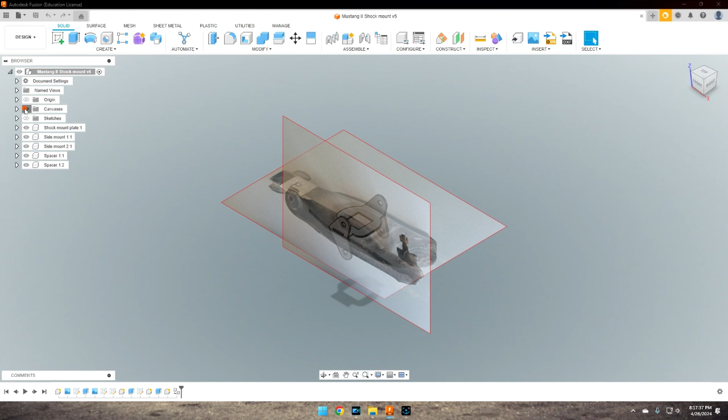Okay, so I'm going to walk you through real quick on how I managed to design this part in Fusion 360 without the need of 3D scanning. Let me open the file up here, it'll make it a little bit easier for us. I'm not going to try to redesign this part, we're just going to open up the one that I currently have and go from there. Let me turn some of this stuff off so we can walk through it.

So what I did was I actually brought the part in through canvas. I laid the part down on a flat surface, took my cell phone, and I've got a little cheap level thing, like a bubble level, it's round. I set it on top of my cell phone to make sure I get a good level, square picture of the item I want to do. Once I have a dozen pictures or so, whatever you want to insert.

Once you have your pictures done and uploaded, you can click on the insert function, go to where you have the file saved, and then select insert. Now once it's inserted, you get this. Let's look at it from the top.

The pictures, I just took with my cell phone, it's not a 3D scan, it's just a two-dimensional picture. You can see here looking at it from the side, that's what you get. But what you can do is come here on the picture, right click, and then calibrate.

It kind of goes this color, and you can pick a spot that you have measured that you know the dimensions of. So I picked a spot like here and here, and I know mine is roughly 60 millimeters center to center. When I set that, it scaled out this whole picture.

Everything was scaled, everything looked good. I'm loving it. We're good, we're golden.

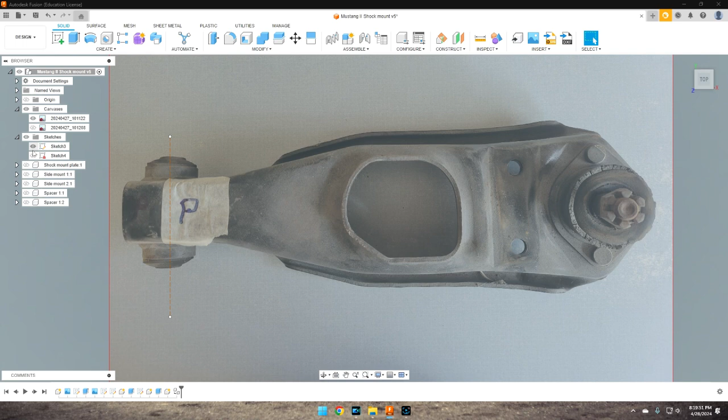So that's done. I started creating sketches. My first sketch, I can come down here, we click on the sketch feature that I ended up sketching out with my dimensions and stuff that I generated, based off my drawing, which got me pretty close.

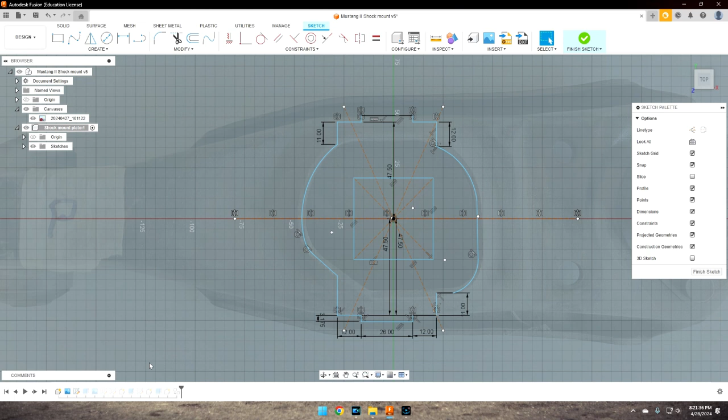This is not the first sketch that I did. The nice thing about parametric modeling is that you can go back in time, make changes, and it changes everything to the future. So we've got the first sketch done. You can see it kind of on top of that model there.

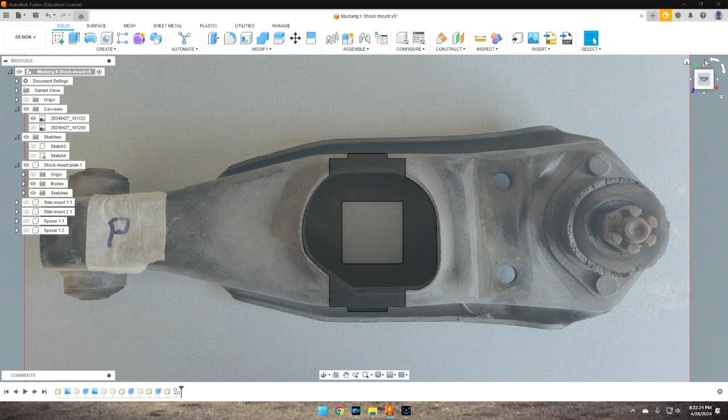And then once we did the extrusion, you can see what the actual bodies look like. So this is what the body ended up looking like on the side. Now, again, this is a 2D model. So if we want to finish designing out what we need to do, we need to bring in the next picture.

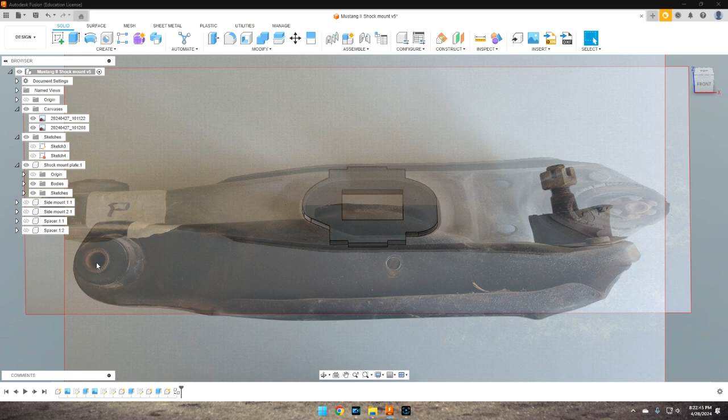So here's the next picture. I brought it in. Now what I did was I actually drew a center line through this bushing back here so I could line it up on this view and get us the center view. Now I brought this picture in and I didn't want to do a whole bunch of trying to move things around and get it exactly right, but this plane here, actually I wanted it a little bit lower. I want it almost flush with this.

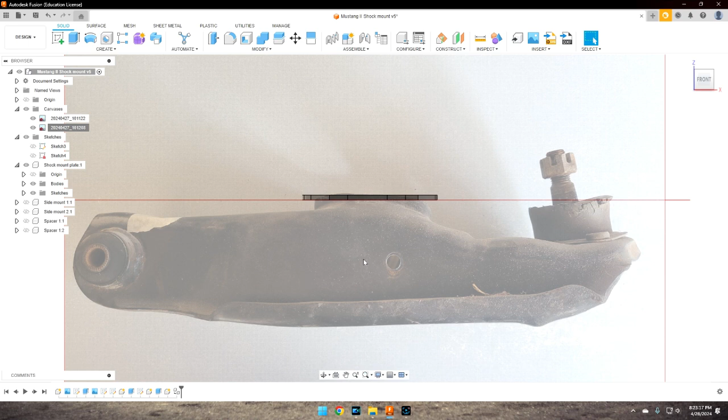But what I did, instead of trying to move all that around, was whenever I dimensioned this, whenever I calibrated it and got my calibration where I wanted it, I actually took this hole and just moved it up whatever that distance was there. I don't remember exactly what it is, but you'll be able to see right here in the sketches in just a second.

Let's see, there we go. There's one of the side plate. You can see where I moved this hole up, and then that put everything on line.

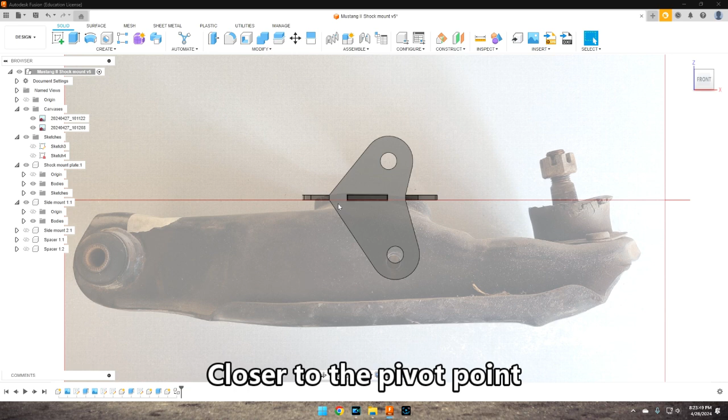Now I did kick this hole back a little bit. I did not go 90 degrees straight off of this because I wanted this hole to set back a little, because this arm is actually going to have a little bit more down angle to it. So with more down angle, I wanted to bring this hole closer to the pivot point to try to keep everything more in line of where it would be at down here, if that makes sense.

Now you can kind of look at it in a 3D-esque view, I guess you would say. It's two-dimensional, but looks kind of three-dimensional. But that's how you can create something like this without having a 3D scanner. Yeah, that's how we did that.

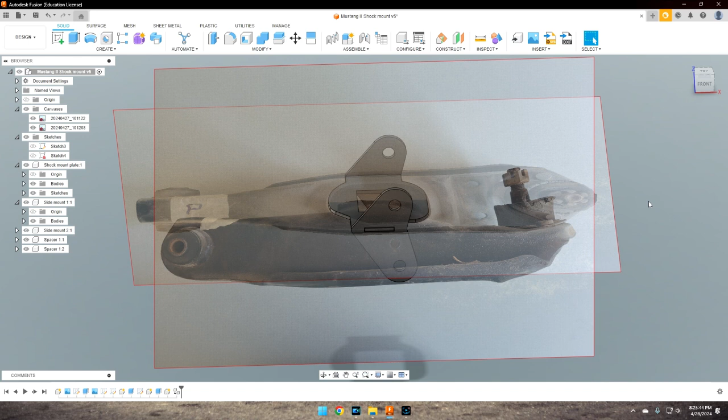But I am not a Fusion 360 aficionado. I mean, I'm stumbling through this stuff and watching other people do YouTube videos on this just like anyone else. But this is how I managed to stumble my way through this design, and stick around to the end of the video and you'll see if it worked or not.

All right, so now that you've seen that, that took me a little while, but just getting everything situated, it probably would have been a little bit easier if I would have 3D scanned it, but I didn't, and I wanted to try this to see how it worked, and I think it worked well. I mean, we're getting ready to find out.

So as I showed you in that video, I was able to save the drawings and export them out as a DXF. And what that has allowed me to do is import them into Lightburn. And what I do, I use the Lightburn to make my DXF file for burning it on the CNC plasma. So that's what we're going to actually end up doing.

But I'm sitting here at the laser because we're going to set this up on the laser, cut it out of cardboard first, because that's a whole lot cheaper than metal, and it's going to be a little bit quicker and less cleanup and less mess. And we're gonna test fit it on the control arm. So fortunately, I hope this comes through pretty good for you.

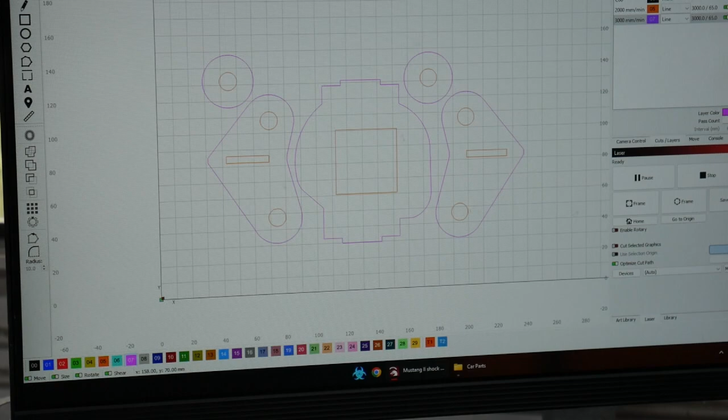These are the parts that I designed in Fusion 360. I exported them as a DXF file, imported them into Lightburn. I had to do a little cleanup because when you export out of Fusion 360, you have to export out the sketch, and any extra sketch lines in that sketch are going to show up. So I had to get rid of some of those, which was no problem.

We did the cleanup and brought all the parts in. What we have here is the top plate that's going to weld on top of the control arm itself. This is actually going to go where the spring perch goes, as I showed you in the Fusion 360 stuff. These are the two side pieces, and these are a couple of spacers to get us back in line.

So what I've done is I've got a piece of cardboard set up on the laser. It's not quite 1/8 inch thick, so I'm going to do 2 burns to cut 4 of these out so I can get a good feel of the actual size.

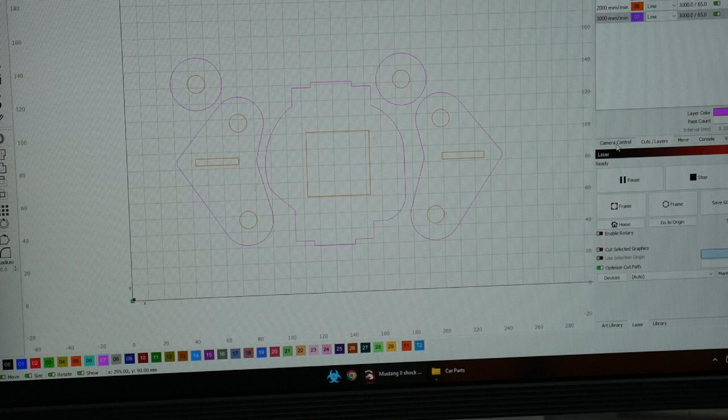One of the things, when we set up the camera and stuff, I wanted to do that because everything was supposed to help. So what I've done is I've set up the camera, and as you can see here, it actually shows on the screen where my material is.

Now if I click show over here, boom, it's going to show it up on this. Now I had a piece on there a little bit earlier, so let's update the overlay. Okay, there we go. So this is the piece of material I've got on there that we're going to cut these brackets out of.

So let me get you set up so you can watch the laser, watch your eyes so you don't get hurt, and we'll turn this sucker on and let it eat.

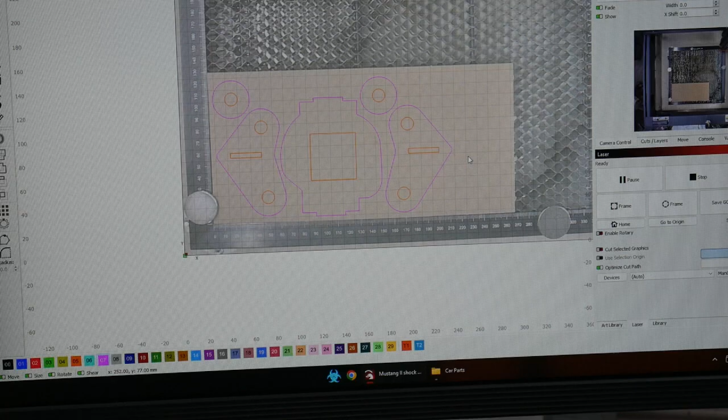Okay, so I'm going to throw a couple of magnets down to help hold this thing so the wind don't blow it around. One of the nice things is I can look at this on the screen and see where I can put my magnets at and not have any issues.

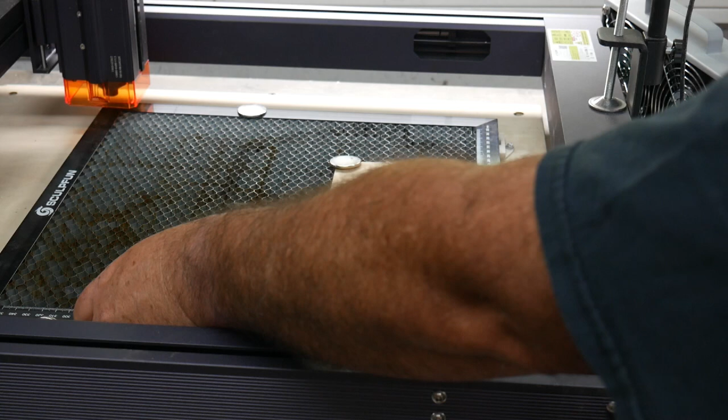Which I know I should be able to go right about there. And if I'm concerned about them being in the wrong place, I can come back and do a trace overlay update and make sure that my magnets and stuff are going to be out of the way, which I should be, but we're going to update it real quick and see.

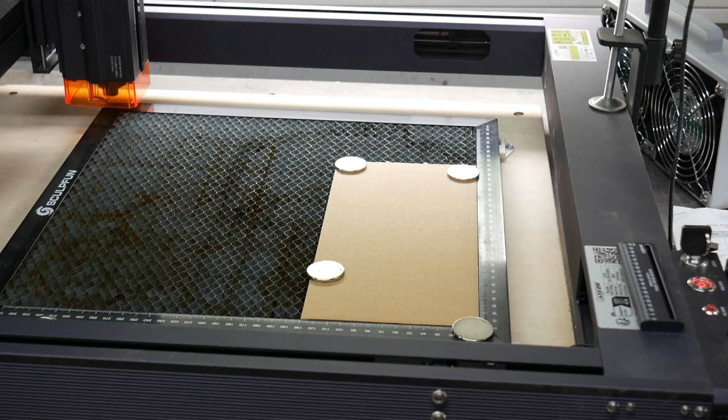It's going to come over to there. I'm going to set my gauge block up. I don't use the automatic height adjuster on here because there's some inherent issues with that. It's just best to set it up with this.

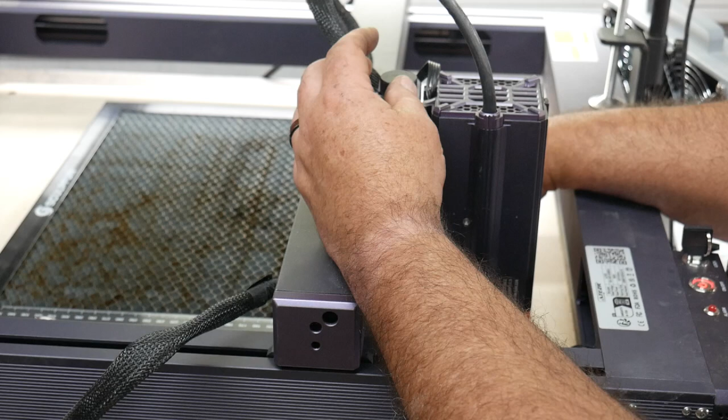And if you're doing some burns, engraving is really precise, you really need to be in just the right spot. For cutting, not quite as precise. So here we go.

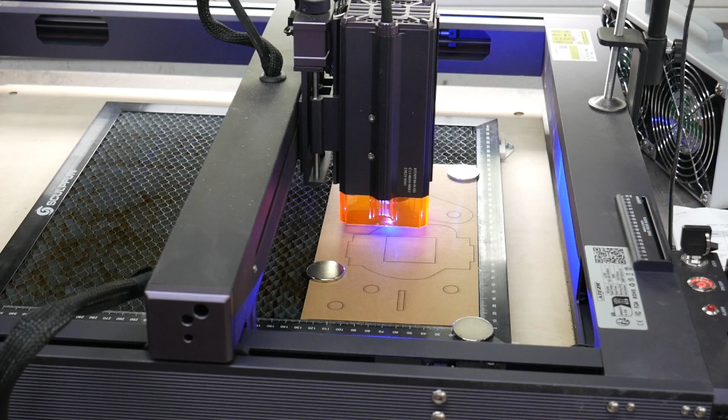Now the really nice thing about having that camera is if I was to take this out, now that it's done, and I was like, oh crud, it's not quite right, I can position it back by the camera.

It did not seem like it went quite through, so I'm going to run a second pass on it, which I can do right now just because it's where it's at. If I would have slowed my feed rate down some, it probably would have done it, but I haven't done much cutting out of cardboard to know.

But I can see my parts dropping out, so 2 passes would have worked, or I probably could have cut my feed rate just about in half, which would not have been slow by any means, or upped my power a little more. I'm still learning this, but it is great to have this thing to do this type of stuff if you're looking at doing some custom parts and pieces.

If I was still in a production fab shop doing this, I would definitely have something like this that I could do my parts out of. So let's see how it does. Oh yeah, everything broke loose, so we're good to go. I'll take my magnets off.

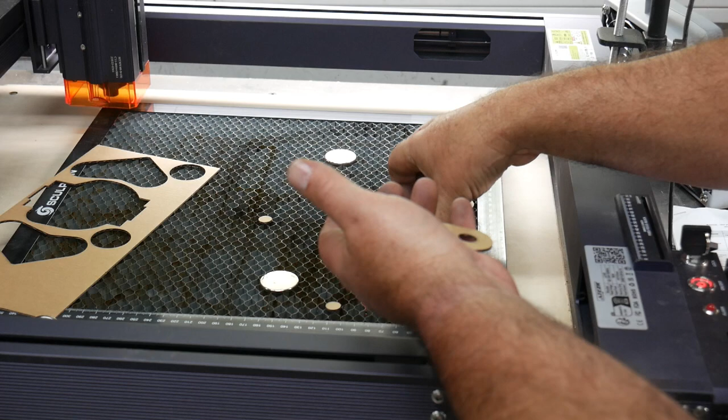So yeah, there's the cardboard. Got my 2 spacers here that's going to go on the inside. Everything drops out really nice and neat. So there we go, there we have it.

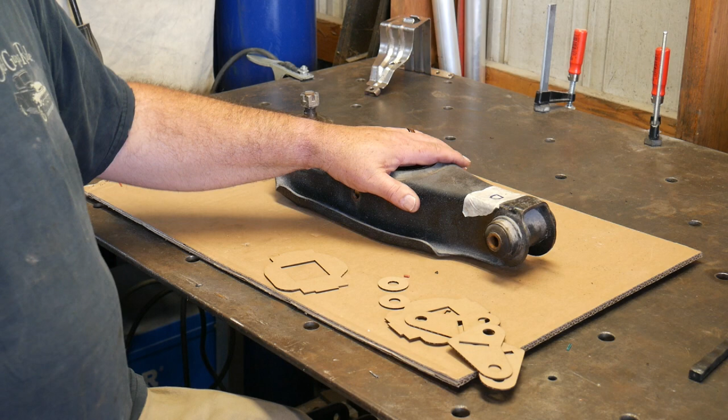So let's go over to the welding bench now, and I'll show you what this is going to look like. We've got the other set of parts cut out. I've already machined this one down, and all I've done is, you could do it with a grinder, you don't have to have a milling machine to do this with, but it was just simpler, easier, and just about as fast for me to set it up in the milling machine.

I still got to do the other one. I may take a video of that here in a second. But this is the stock control arm. The stock shock mounts way down in here. We wanted about 2 more inches of height out of this thing, so that's why I'm going this route.

And the cool thing about it is what I just did on the laser, I can just take that information, throw it into plasma, and we're good to go. So, only reason why I'm having to double these up again is to get us right at the thickness that we want for our actual part.

So we'll look at our control arm here. We'll figure out which way it's got to go. So it's kind of got to go like this. Let's see if I got something here I can put underneath this so you can see.

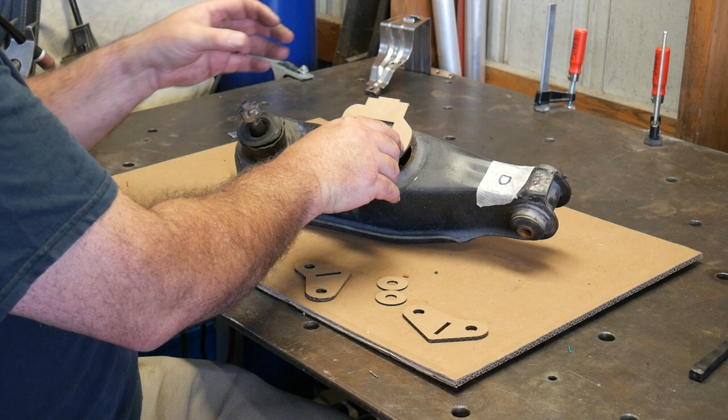So this is going to end up welding on here like so. I still got to dress it up some. I made these cutouts here so that this will have a nice little way to set and lock into place, and this will fit over on both sides. So this fits in here.

That bolt, you can still put a bolt and a nut through there to help hold it in place, but we're going to weld it here also. We do want some rigidity on it. So actually what we'll end up doing is grinding a little bit, I'll throw a tack weld on each side of this once we get it in place. And the other ones fit on the other side the same way.

Now, next step is to actually burn these parts out on the plasma table. So that's what we're going to do next. I'll turn you around, we'll get on the plasma, and we'll throw this file in SheetCam, and then we will get it loaded into Mach 3 and see if we can cut some goodies out of steel and get it on here now that we know it's going to fit and work the way it should. And that's pretty much what we've got.

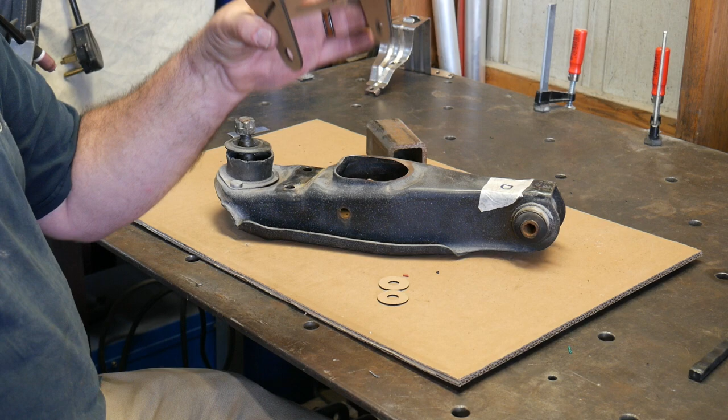Pretty simplistic. Okay, as you can see on the screen here, we've got Mach 3 up and running for SheetCam, for the plasma cutter. Brought the first piece into SheetCam. You can set these up to do multiple parts at a time, but I've been having a heck of a time getting my plasma dialed in.

If somebody knows some other software other than SheetCam and Mach 3 or Mach 4, I'm open to that also, something that's simpler, because I usually end up spending an hour or two getting my settings right, and a lot of it is simply because I do not do this every day.

But anyway, we got some parts cut. I've got them over on the bench cooling off. I'm going to reset the camera so you can watch it, but yeah, the only thing I have to do right now is play with my actual feeds.

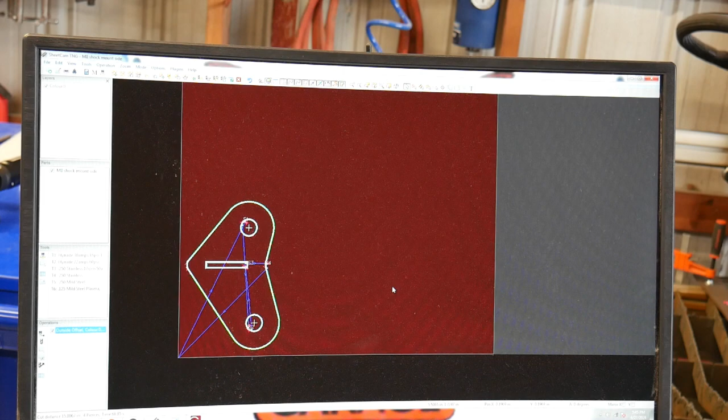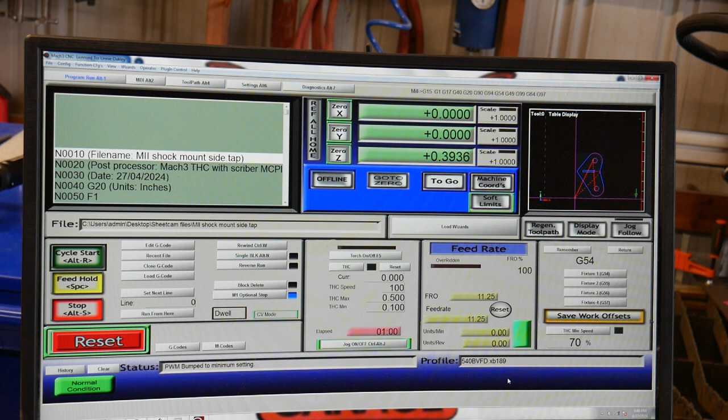I need to change my hole settings and that kind of stuff that I have set up, but to get this cut out and done for right now, I'm going to leave it where it's at, because my hole settings are a little too slow and my straight line cuts are a little too fast. So I'll get those done and I think we'll be on par.

Okay, I made a couple of tweaks to my hole settings, so we're going to give it a shot. Like I said, I may have to play with my feed rates a little bit, but as long as we can get these pieces cut out and get them on, I'm happy with that. But I hope I'm getting closer to getting this thing dialed in. So let's fire this puppy up and let's see what happens.

Sweet, that actually turned out pretty good. My smaller hole diameter, I think I need to speed that up a little bit still. We got one more piece to cut. We'll see how that works, but hey, man, I'm tickled to death with that.

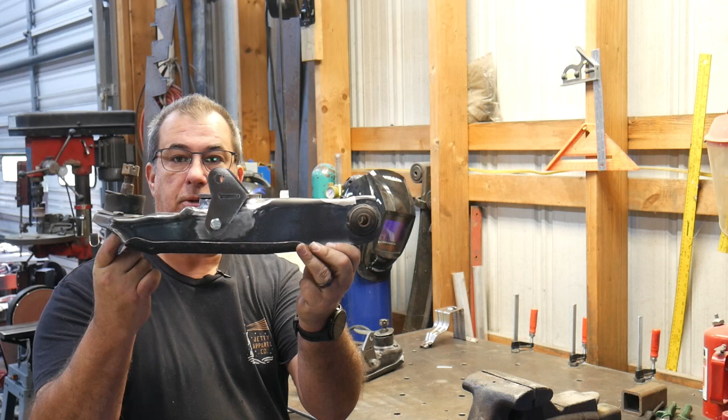Again, I'm going to weld these on. I would highly recommend, if you're using a stamped steel arm, that you go with a setup like this. If somebody's interested, I'll be happy to make some more. If not, make something for yourself.

But if you're going with the stamped steel arm, all your load on your shock and spring, if you're running a coilover—correct that, if you're running a coilover, all your load is on this center bolt that's on this arm. This arm was designed for a spring to sit in this pocket and the shock just to dampen your motion. So your weight is actually designed to be on this, not on the two bolts here, or the one bolt that goes all the way through.

I think you would end up with a lot of twist and flex, but doing it this way with this plate that'll be welded to where the spring would actually mount, and then the ability to put the shock here, I think it's going to distribute the weight throughout the whole arm the way it should be, and I don't think you'll have any adverse reactions to driving. I think it'll be more reliable setup than what you would have with just putting a coilover on it.